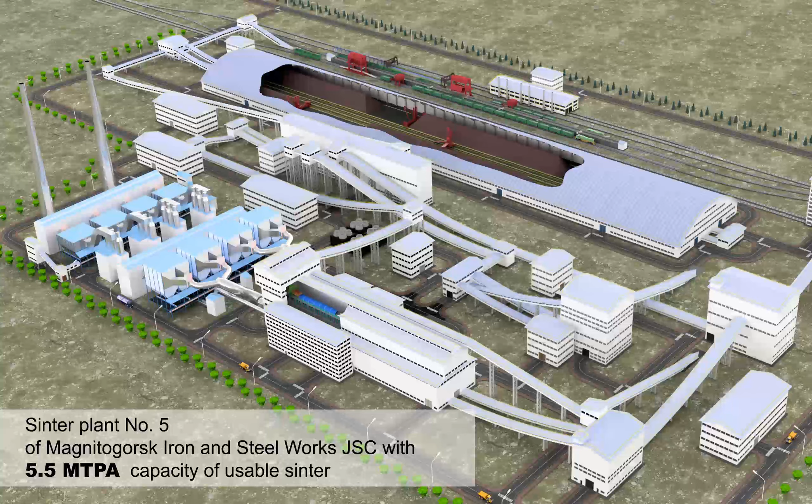We offer you the following areas of cooperation: comprehensive consideration of technological and ecological tasks, implementation of waste heat recovery systems, improvement of recycling water systems operation efficiency, and sustainable management of building and facilities life cycle. High-quality engineering and extensive use of intelligent 3D modeling enables the customer to maximally avoid unforeseen additional expenditures and not to exceed time limits during construction. Our solutions are successfully implemented at such industrial enterprises as Metinvest, Severstal, ArcelorMittal, and Solvay.

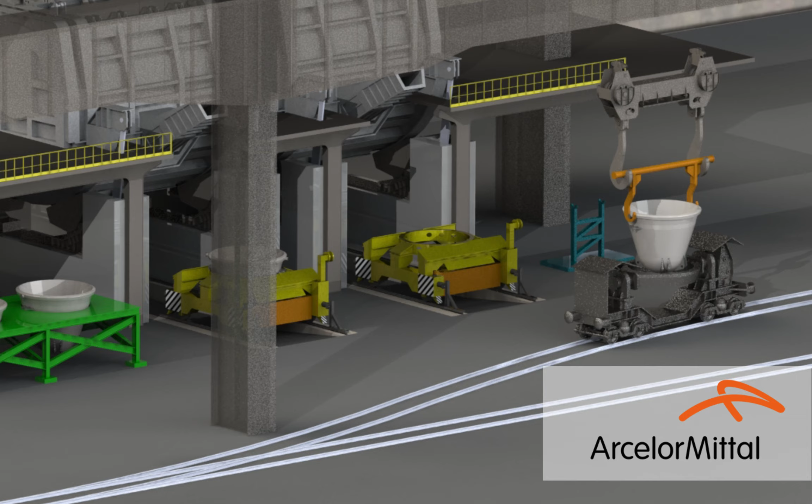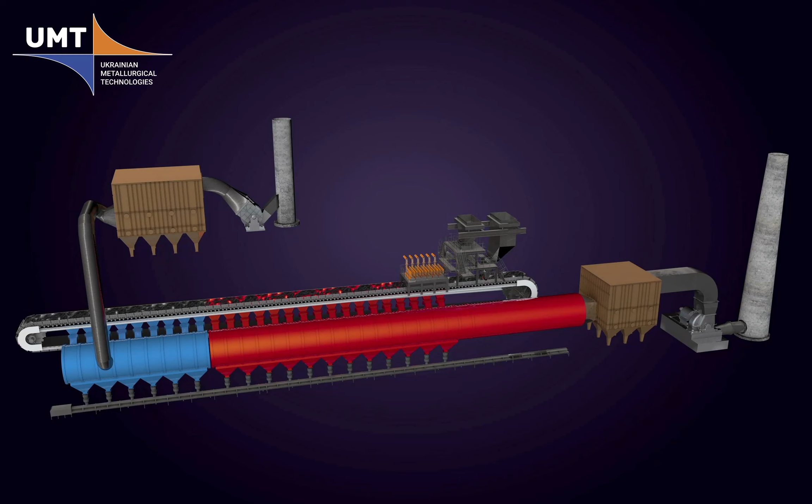One of the examples of improving efficiency of technology with a payback period of 1-2 years is the comprehensive solution for sinter production. It is aimed to increase efficiency, improve quality of sinter, and observe environmental norms. We have studied the existing operation scheme of the sinter machine that is based on irreversible losses of heat caused by solid fuel combustion in sinter cake, while heat losses amount to about 40%. This technology is characterized by low capacity and poor quality of output products with approximately 12 to 15% fines content. There are also two powerful sources of emissions in the form of stack flues that have a negative influence on environmental performance of the enterprise.

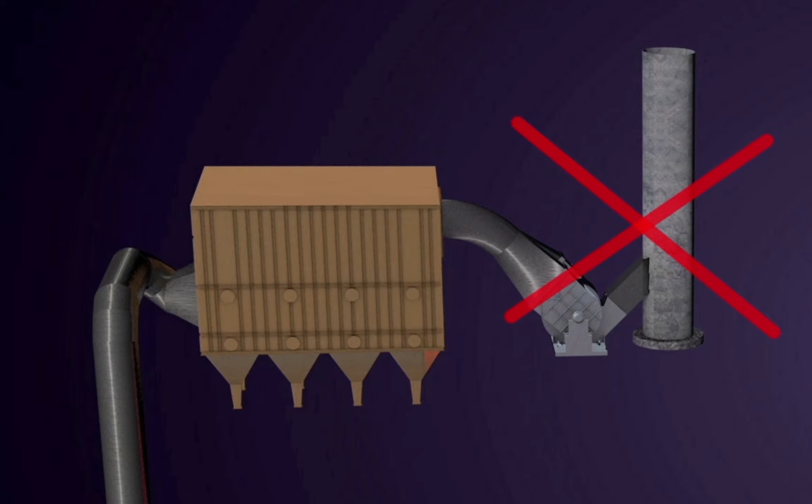As a result, specialists of Ukrainian Metallurgical Technologies, in cooperation with partners and departments of the customer, developed a solution that enabled changing the direction of airflow of the cooling zone for easy transfer and recycling of heat received from hot sinter cooling after sintering. This enabled to improve qualitative characteristics and at the same time decrease operational expenditures, while the stack flue and gas cleaning system of the cooling zone were excluded from the technological cycle.

This solution enabled to increase sinter workshop capacity by 30%, improve sinter quality, while content of fines with fraction from 0 to 5 mm did not exceed 5%. Hot strength and reducibility of sinter increased by 5%. Temperature of finished sinter was within 120 degrees Celsius, consumption of solid fuel into burden of sinter machines decreased by 15%, and all environmental requirements were met.

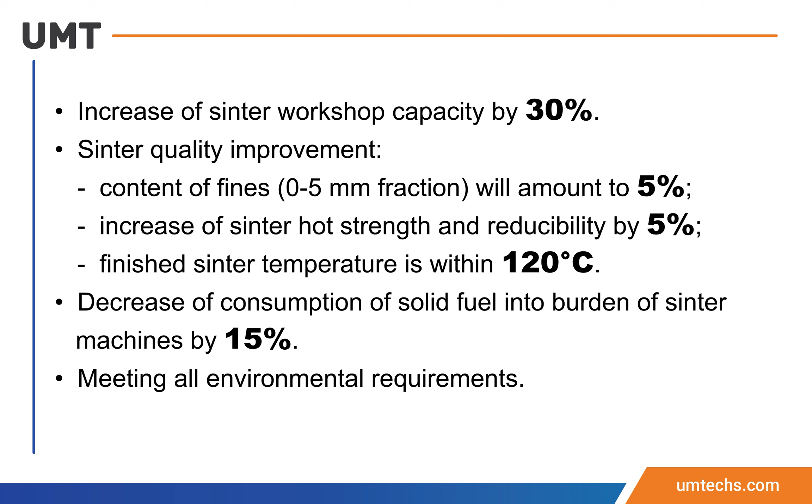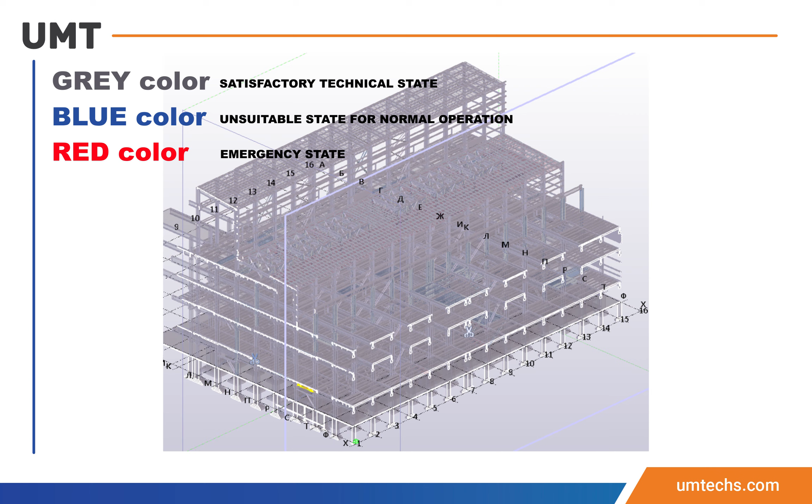In order to calculate expenditures for construction and installation work on modernization of sinter production, simultaneously with development of comprehensive technological solutions, specialists of Ukrainian Metallurgical Technologies surveyed the building of the sintering facility with its subsequent 3D modeling. This enabled to estimate its current state and specify the required scope of work on strengthening the building, taking into account implemented technological solutions, while probability of errors during project implementation was eliminated.

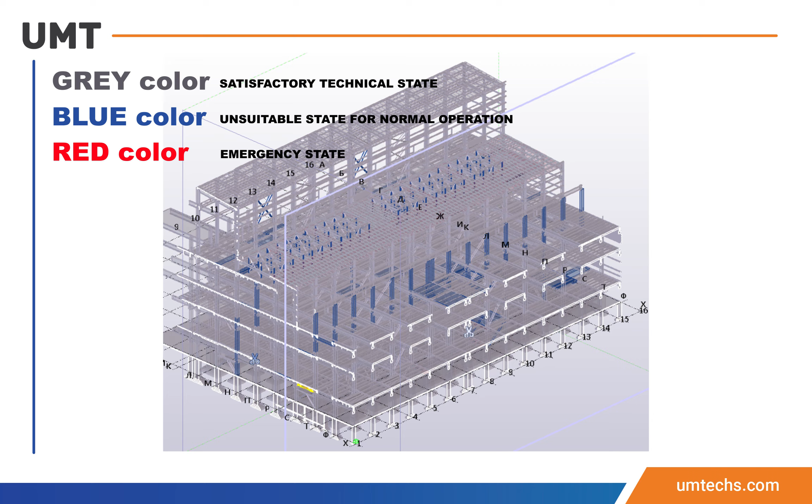Applying a comprehensive approach for solving some high-priority tasks allowed meeting customers' requirements to decrease the budget for implementation of this solution from $250 million planned for new construction to $54 million for reconstruction. Such approach enabled also to improve efficiency of the existing technology and ensure high investment attractiveness of the project with minimum payback period.

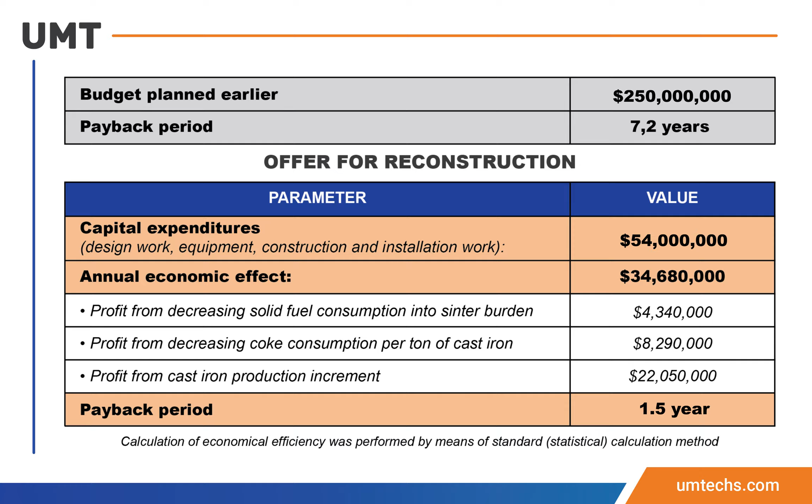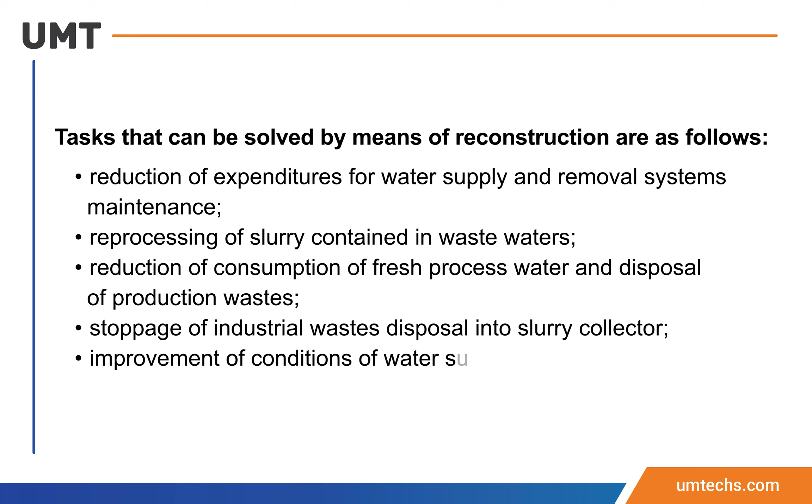One more example of improving the production efficiency of a metallurgical enterprise by means of a comprehensive approach is the solution for water supply and removal system reconstruction with a payback period of 1-2 years. Tasks that can be solved by means of reconstruction are as follows: reduction of expenditures for water supply and removal systems maintenance, reprocessing of slurry contained in wastewaters, reduction of consumption of fresh process water and disposal of production wastes, stoppage of industrial waste disposal into slurry collector, and improvement of conditions of water supply and water removal systems operation.

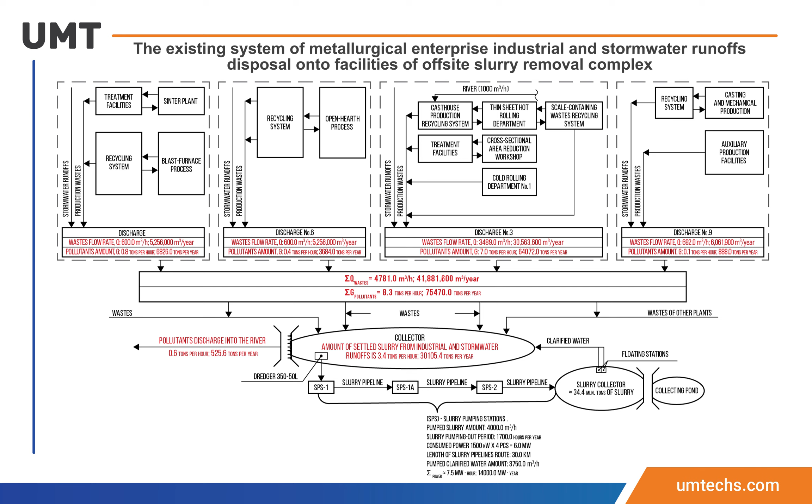The existing water removal system makes provision for discharge of stormwater runoffs and production waste into the slurry collector. After concentration, homogenization and sedimentation of pollutants, clarified wastes are discharged into the river and sediment is pumped into the slurry collector for thickening. The existing water removal system requires large operation costs. Specifically, power supply of the complex requires 14,000 megawatt-hours per year. That brings about payment for power in the amount of $1 million per year.

In order to reduce operating expenditures for the existing facilities and utilities, the feasibility of water supply and removal systems reconstruction was proved. The reconstruction includes the following: providing recycling systems for equipment cooling, arrangement of local purification systems, arrangement of after-treatment of part of waste with subsequent use for makeup of the recycling system and stoppage of fresh process water consumption, return of overflow and blowdown waters into the recycling system, reprocessing of additional sediment on the existing facilities and its usage in production, and reduction of expenditures for power supply.

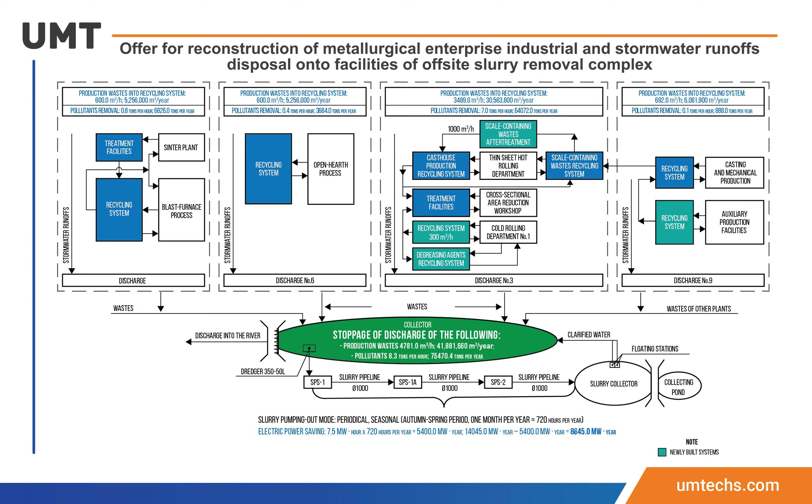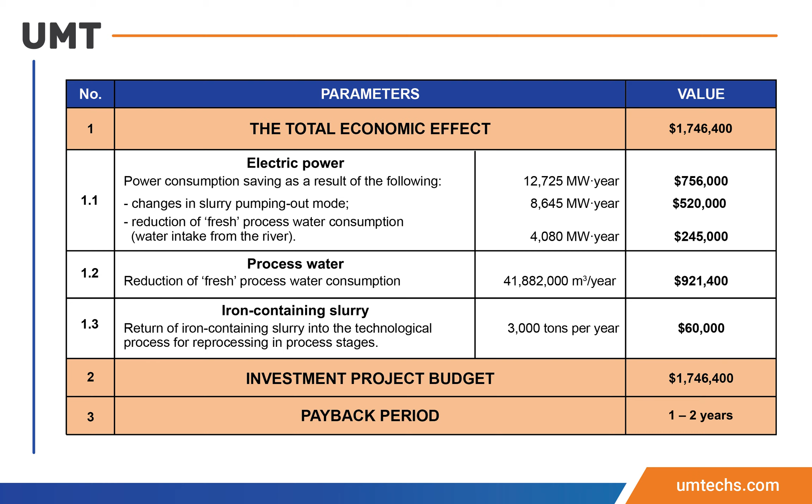Advantages of the suggested reconstruction scheme are as follows: stoppage of discharge of production wastes and pollutants into the slurry collector, periodical discharge only of stormwater runoffs from the industrial site only during the warm period, reduction of fresh process water consumption for makeup of recycling systems for equipment cooling, solving of problems concerning operation of facilities and utilities, as well as reprocessing of resulting slurries. Total economic benefit that can be obtained from water supply and removal systems reconstruction owing to saving of power, fresh process water consumption, as well as reprocessing of iron-containing slurry will amount to $1,746,000 per year, which proves feasibility of reconstruction with a payback period of 1-2 years.

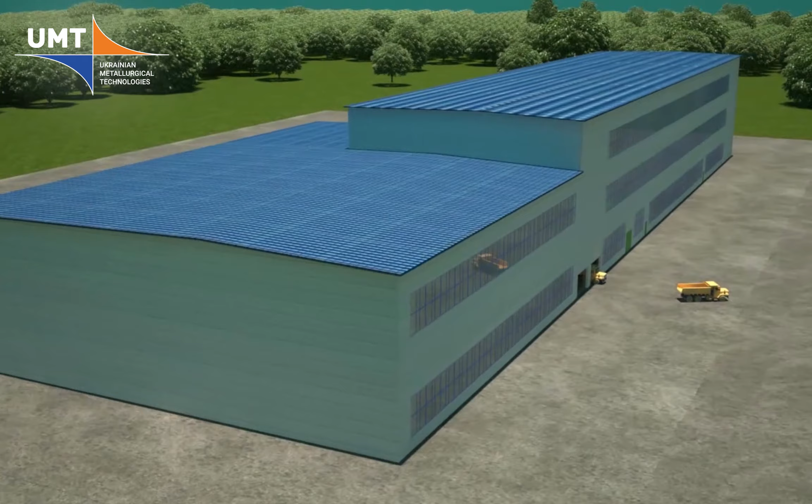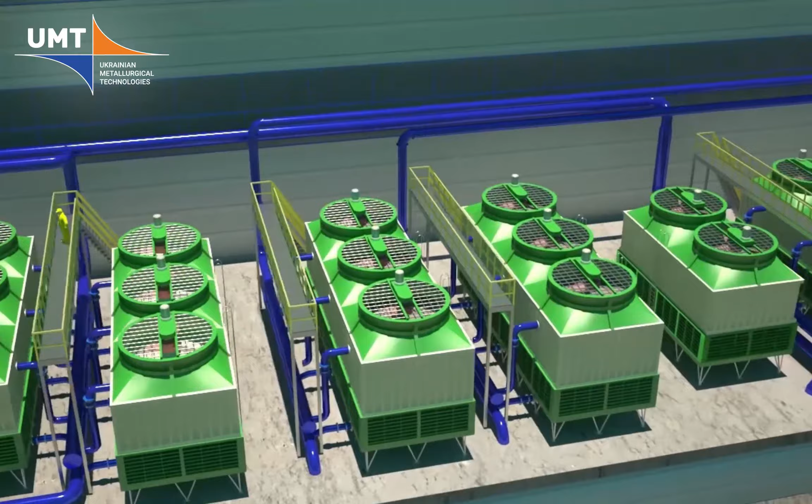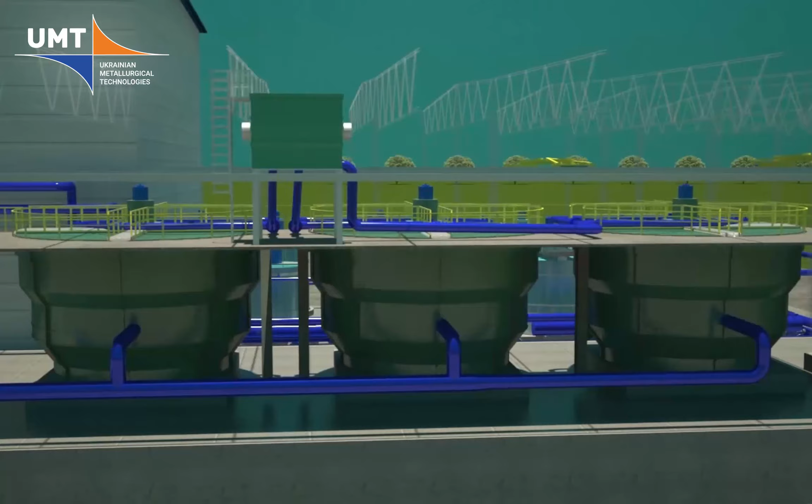Also, an example of effective engineering solution is the development of a unified water treatment complex for a casting and rolling module consisting of 2 converters, 2 continuous casting machines, and 3 rolling mills. The water treatment complex consists of the following: 8 recycling systems ensuring supply of water with corresponding parameters and certain quality for equipment cooling, a system of return recycling water and polluted waste treatment to the required quality of water in the recycling systems with maximum use of zero discharge and non-waste technologies. The amount of generated waste concentrate is no more than 0.7% of the complex capacity.

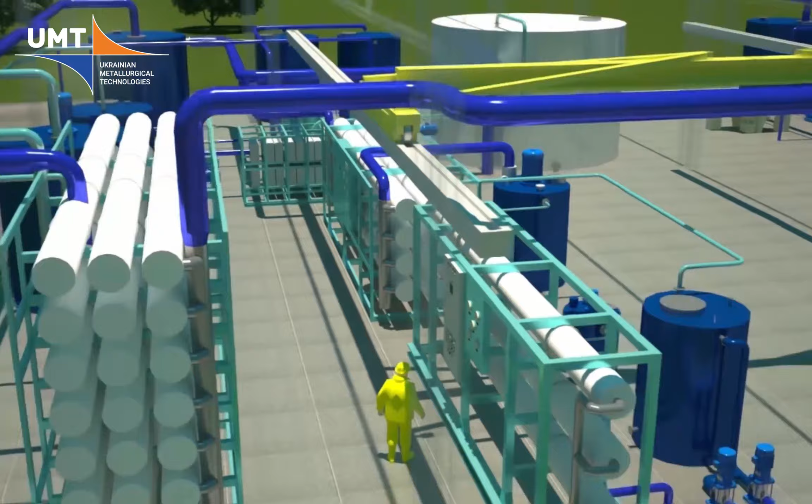The generated slurry is dehydrated and reused as follows: iron-containing slurry in the main production process, lime slurry in the auxiliary production process. Also, the water treatment complex consists of makeup plants for 8 recycling systems of 5 types of quality: processed, clarified, softened, demineralized, desalted, and highly desalted, permeate.